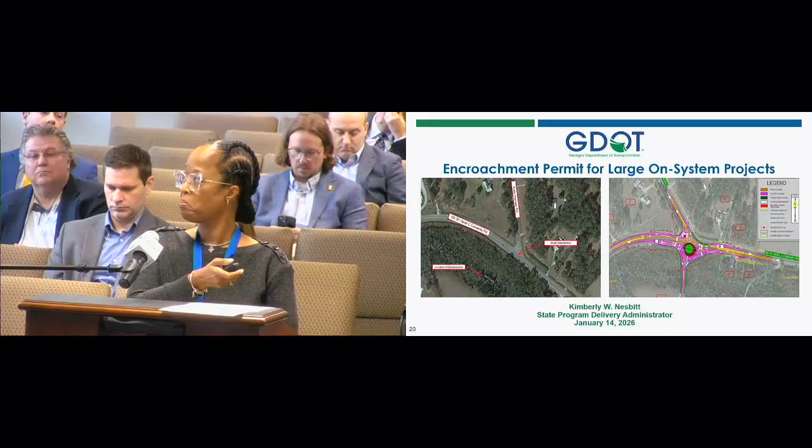Am I supposed to be pointing in a certain way? No, hold on. Get my one? Yeah, let's see. It's up. User errors. So let's continue.

The Office of Program Delivery manages over 1,000 projects statewide that follow the design bid build process. This includes federally blended and 100% state-funded projects. OPD is also responsible for the Local Administrative Program, affectionately known as LAP, for projects sponsored by local governments.

For fiscal year 2025, Office of Program Delivery successfully authorized 138 right-of-way phases equaling $131+ million in funding, and 109 projects led to construction that equal up to $1.3 billion. For fiscal year 2026, we are programmed to authorize 154 right-of-way phases equaling $106+ million in funding, and 153 projects led to construction that exceed $2.1 billion.

In order to deliver OPD's assigned program, we have over 200 employees for the capital program. Project managers on average are assigned 12 projects, and the traffic ops, bridge, and local sponsor programs have on average 20 projects. The office is also responsible for invoice processing through the Consultant Management Information System, CMIS, for A&E contracts. Our contract techs are responsible for monitoring and responding to customer service questions and issues and resolution for consultant invoice payments for the entire department.

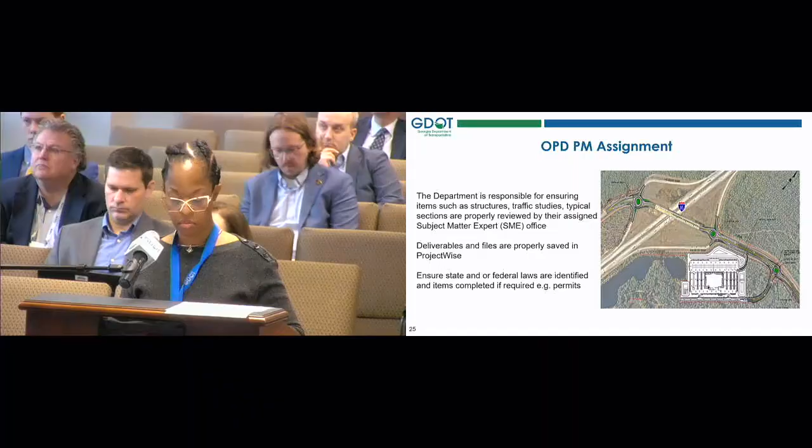GDOT ensures structures, traffic studies, and typical sections are reviewed by subject matter experts. Deliverables are stored in ProjectWise, our official electronic file software, and must comply with state and federal laws if required.

Large encroachment permits are projects funded 100% by local and private sources, as previously stated. The sponsor is guided through the process to ensure all required studies and deliverables are submitted for review and approval. Projects that qualify for this process are projects that change operations, widenings, interchanges, roundabouts, and bridge projects. The project manager also provides guidance on how to request the permit and the assignment of construction management staff by the district for the sponsor.

Key milestones of the encroachment permit process are limited scope concept reports for approval, preliminary field plan review, public outreach, preliminary bridge approval, as well as design exceptions and variances if needed.

Final milestones are final field plan review, right-of-way activities, field plan review approval, and readiness of plans, specifications, and estimate submission. For projects with right-of-way, a final field plan review is scheduled, but can be waived if the quality of the plans evaluated at preliminary review has no major concerns.

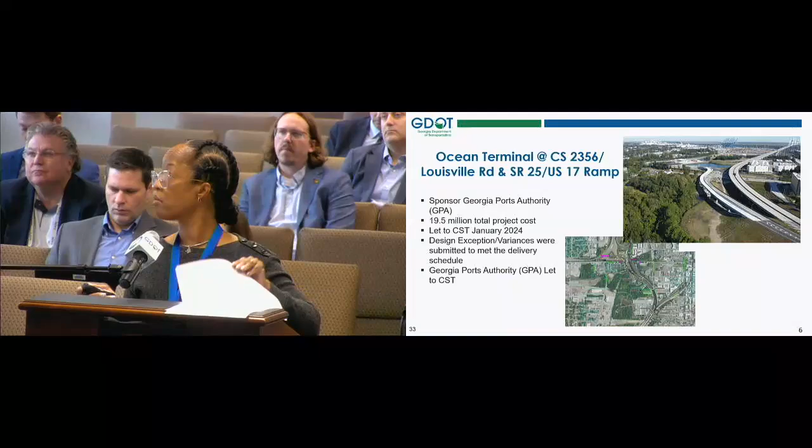To highlight a successful encroachment permit project: the Ocean Terminal at CS 2356, Louisville Road and State Route 25, US 17, ramp to Chatham County. This proposed project starts at Georgia's Port Authority Ocean Terminal and ends at the merge between I-16 westbound and US 17 State Route 404 spur southbound.

The project constructed an exit ramp dedicated to trucks from Ocean Terminal to the bridge over Louisville Road, merging with an entrance ramp for southbound US 17 State Route 404 spur. This is a great example of successful delivery that met the local developer's sponsored schedule, GDOT standards, and will increase mobility for the state of Georgia.

As you can see by the image, those are the concepts of what they thought they were going to build, and what's actually built. It's almost a perfect example of when the plans actually see fruition compared to what you thought you were going to end up building.

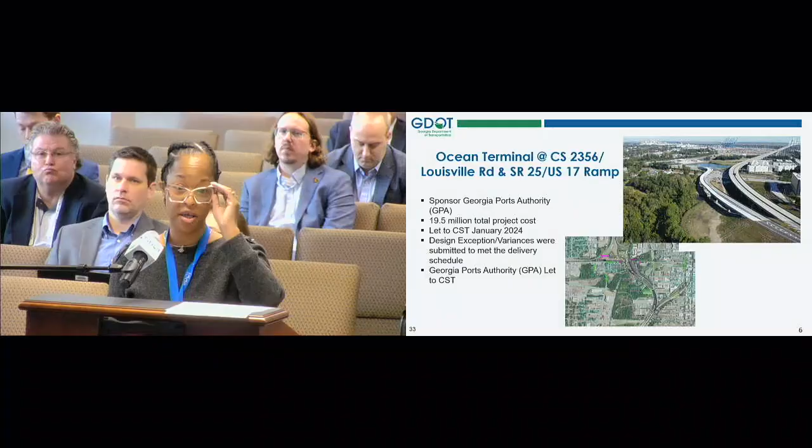But this concludes my presentation. Thank you, and if there are any questions, I'd be more than happy to entertain them.

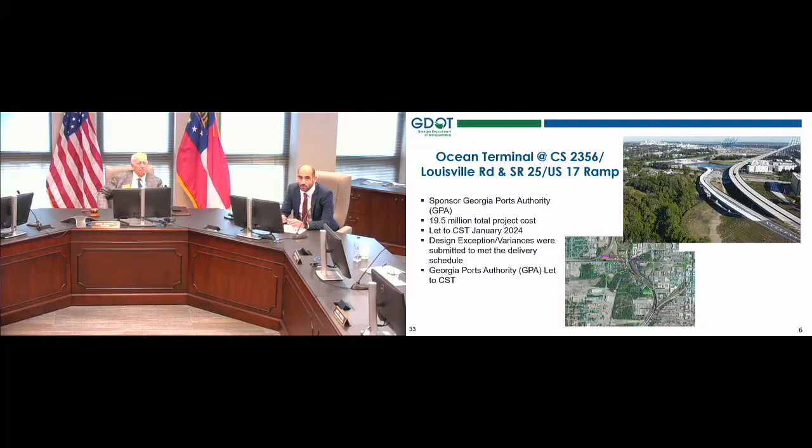Good. Ms. Nesbitt, thank you for this presentation. It's always, I'm always amazed by what your office does. I'm not surprised at what you can handle, but I'm certainly amazed. So keep up the good work. Thank you. Thank you, sir.

We intend to spend every dollar and ask for more, and get those projects on. Okay.

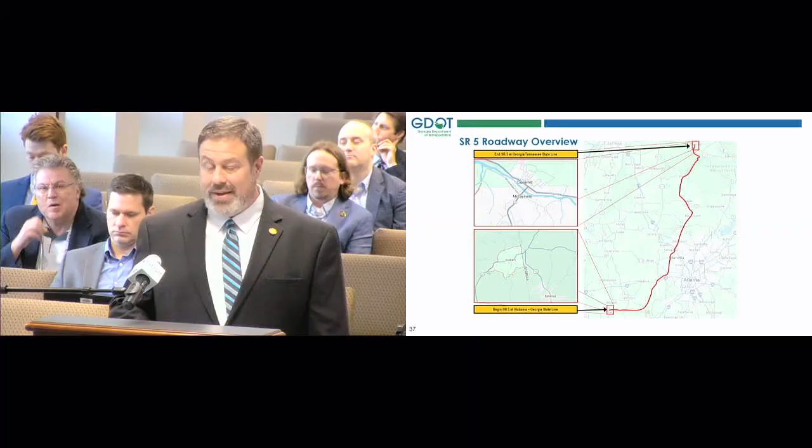Today's presentation will focus on State Route 5 projects that are either under construction or in pre-construction in Fannin County and Polk County, Tennessee. The corridor begins where SR5 diverges from US 515, beginning in Blue Ridge, and continues north to the Georgia-Tennessee state line.

I will discuss the 7 projects identified in this slide in greater detail throughout the presentation. As a reminder, the cone icon represents projects that are currently under construction.

Here's a list of those 7 projects located in GDOT District 6 and Congressional District 9, as well as 1 project in Polk County, Tennessee. The projects collectively reflect a total investment that includes preliminary engineering, right-of-way, construction, and utility of approximately $340 million.

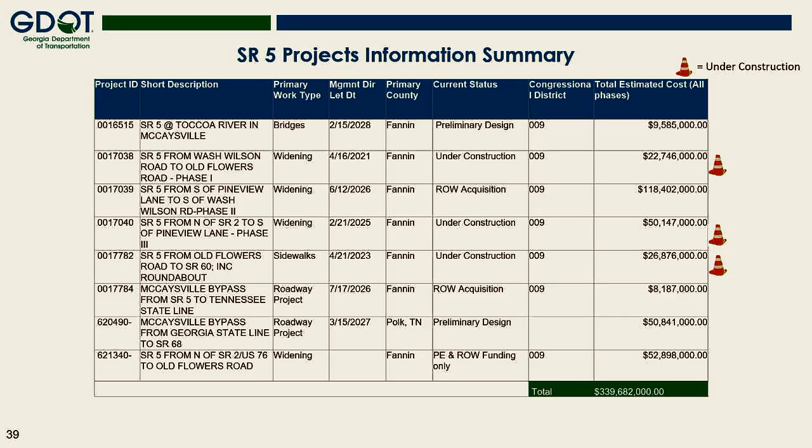The primary purpose of this corridor improvement south of McCaysville Industrial Drive is to provide additional capacity and reduce crash frequency and severity. The purpose of the north is twofold: to construct a truck alternative route to reduce conflicts between large trucks and pedestrians and private property in the downtown area of McCaysville, and to improve the operations and maintainability for the 2-lane section of roadway.

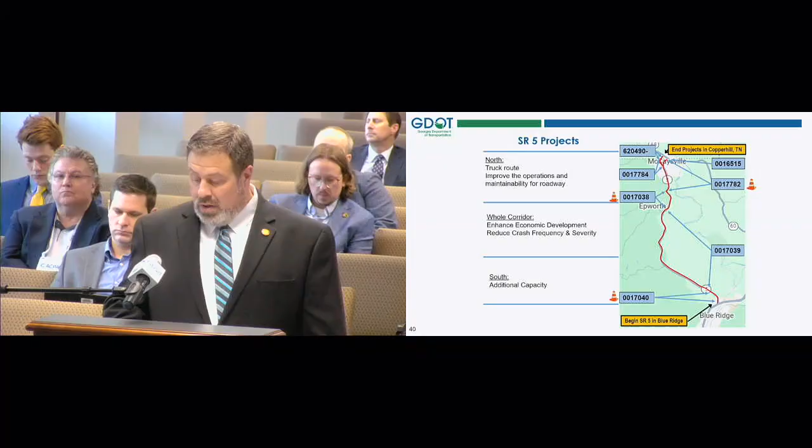All improvements are also expected to enhance economic development opportunities within Fannin County and the Appalachian region. In addition, providing these operational improvements along the corridor may lessen crash frequency and severity.

This corridor improvement proposes to widen the existing SR5 to 4 lanes with a 14-foot center turn lane beginning just north of the intersection with State Route 515 in Blue Ridge and ending at McCaysville Industrial Drive. The improvements would then transition to two 12-foot lanes with improvements to the pavement, curb and gutter, and sidewalks through downtown McCaysville. A single-lane roundabout will be constructed at SR5 at School Street to incorporate the new construction truck route.

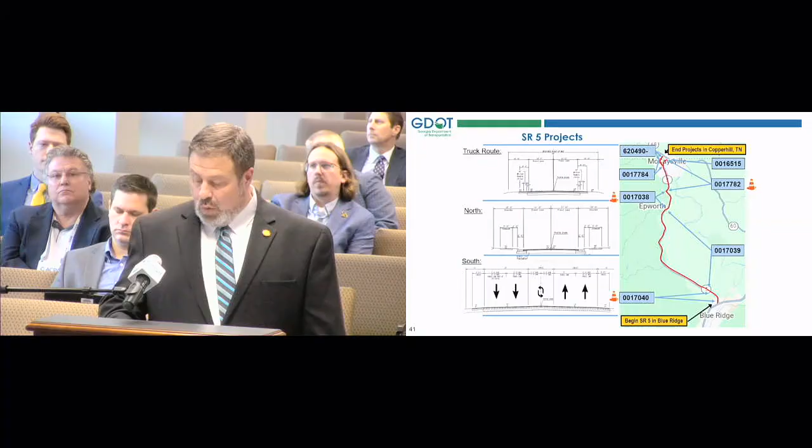The McCaysville truck route has a length of approximately 1.1 miles and terminates at a proposed roundabout at State Route 68 in Tennessee. Now I'll provide you some details of improvements along the corridor.

The first segment of SR5 is PI 17040. It is from State Route 515 for 1.24 miles to Pineview Lane. The roadway is currently 2 lanes in this section, and with improvements already at SR 515, it will be widened to a 4-lane roadway with a 2-way left turn center lane.

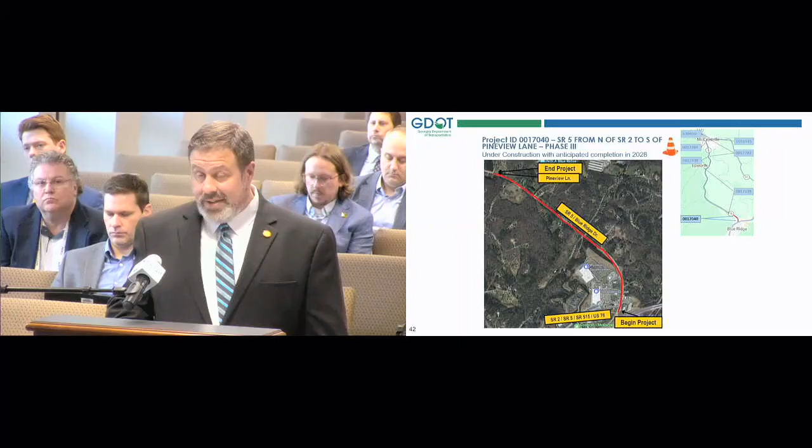This project let to construction in February of 2025 and is anticipated to be open to traffic in the summer of 2028.

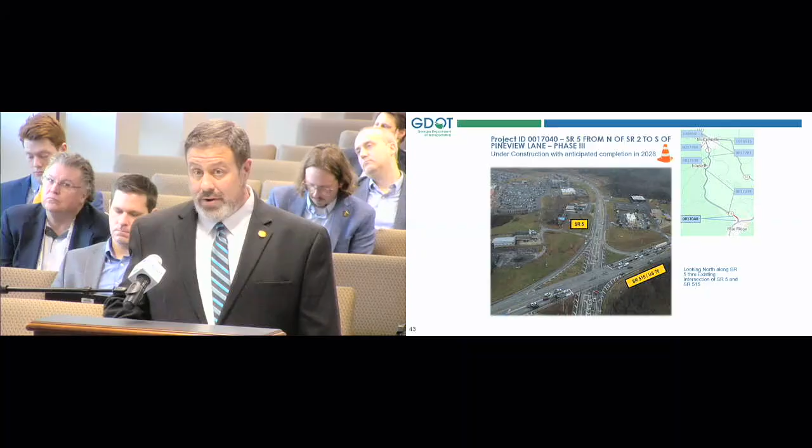This slide is looking north along State Route 5 as it deviates from State Route 515. The intersection is a high-growth area and has an average daily traffic of about 20,000 cars. State Route 5, going to the north here, has an average daily traffic of about 16,000 cars.

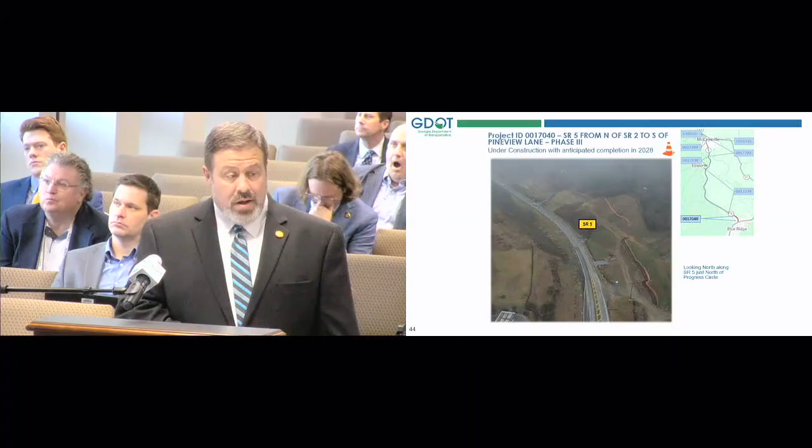This slide is looking north along State Route 5, just north of Progress Circle. You can see the clearing that has taken place and the silt fencing that is installed, although we're zoomed out. Currently, utilities is relocating in this area.

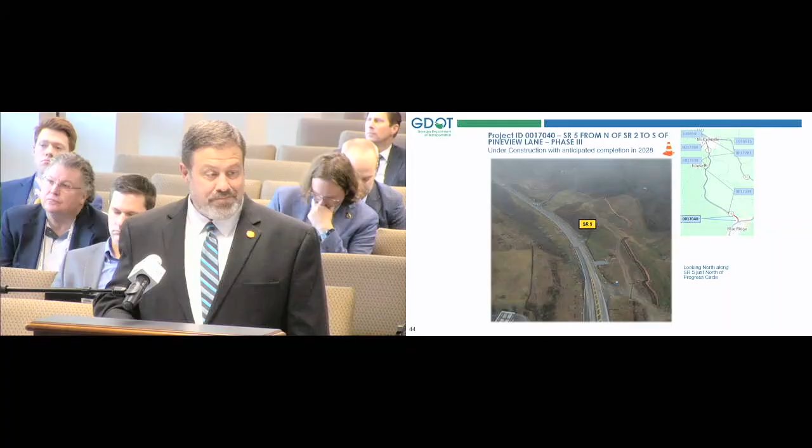The next segment of State Route 5, Project ID 17039, is 5.65 miles from Pineview Lane to Wash Wilson Road. The roadway is currently a 2-lane roadway in this section and will be widened to 4-lane with a center turn lane. The project is in right-of-way acquisition and has construction funding proposed for FY 2028.

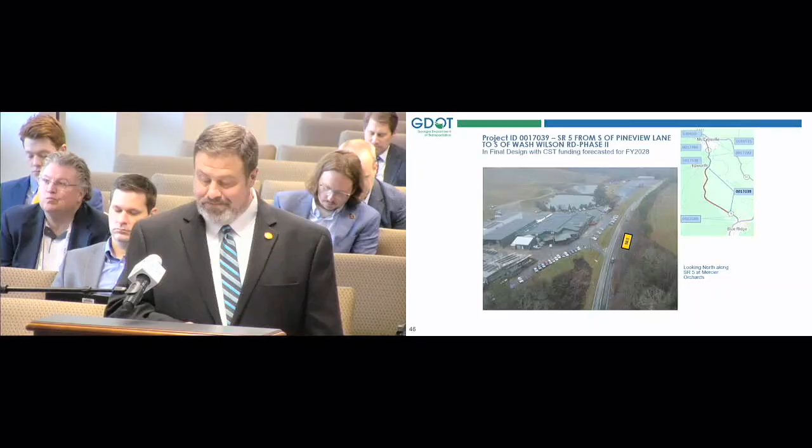The next segment, PI 17038, is 1.52 miles from Wash Wilson Road to Old Flowers Road. The roadway is currently 2 lanes in this section as well, and it will be widened to 4-lane with a center turn lane up to McCaysville Industrial Drive. From McCaysville Industrial Drive to Old Flowers Road, it will transition back to a 2-lane roadway.

The project let to construction in 2021 and is anticipated to be open to traffic in the summer of 2026.

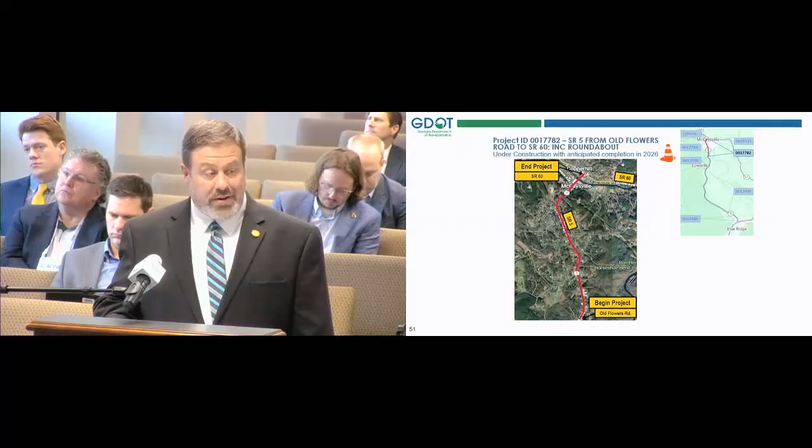The next segment of SR5, PI 17782, is 1.83 miles from Old Flowers Road to State Route 60. This project is reconstructing the 2-lane roadway with curb, gutter, and sidewalks, and construction of the roundabout at School Street for the truck route. This project let construction in 2023 and is anticipated to be open to traffic this spring.

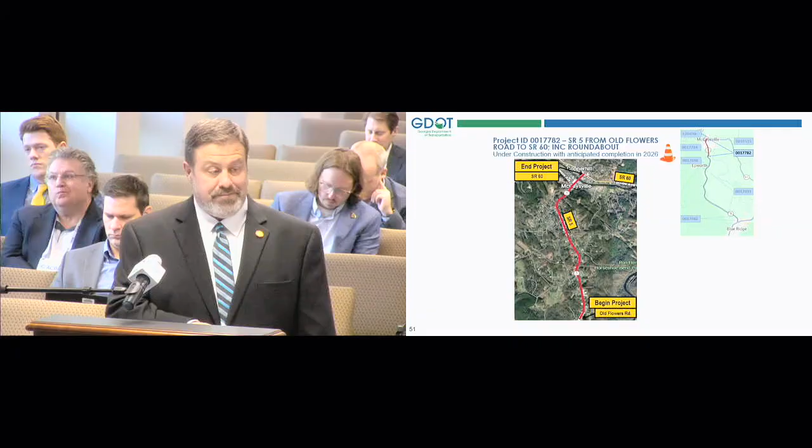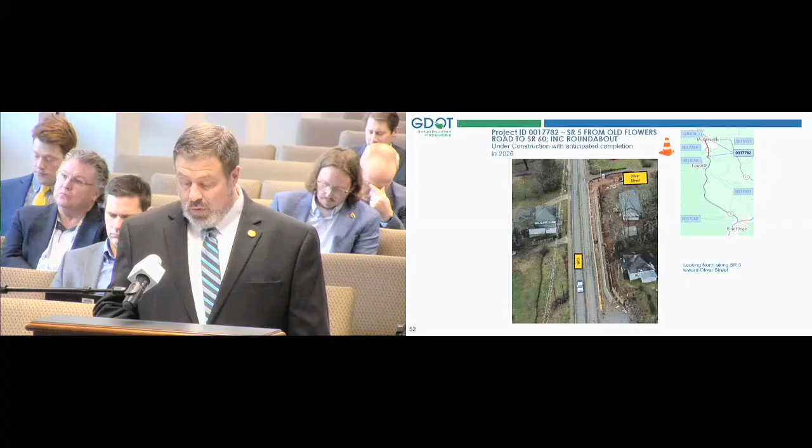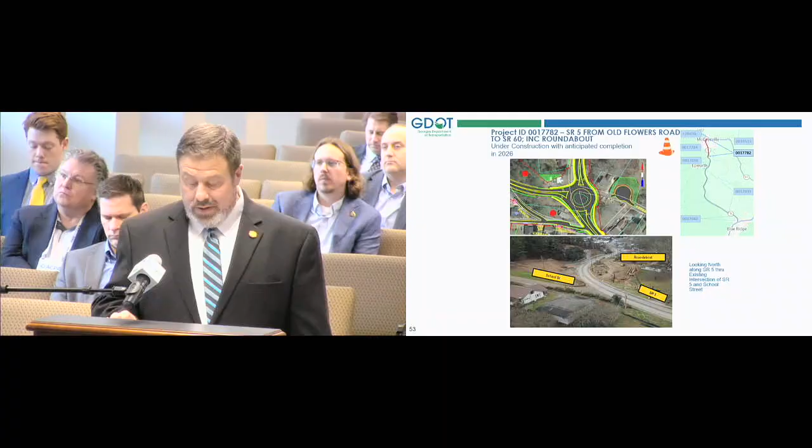This slide is looking north along State Route 5, just south of Oliver Street. You can see the construction of a wall and the utilities being relocated. The top photo is the proposed roundabout design at School Street. The bottom photo is looking north along SR5 through the intersection at School Street, showing the clearing for the roundabout and the utility relocations taking place.

The next project, PI 17784, is 0.34 miles and is the first segment of the truck route. This project will construct a new location 2-lane truck route from SR5 to the Georgia-Tennessee state line. This project has completed right-of-way acquisition and design and is scheduled to let this summer.

The next project, PI 620490, is 0.84 miles and is the second segment of the truck route. This project will construct the new location 2-lane roadway from the Georgia-Tennessee state line to Tennessee Route 68. This is all in Tennessee. The project is expecting right-of-way acquisition by Tennessee to begin early this year and will need 14 months to acquire the property.

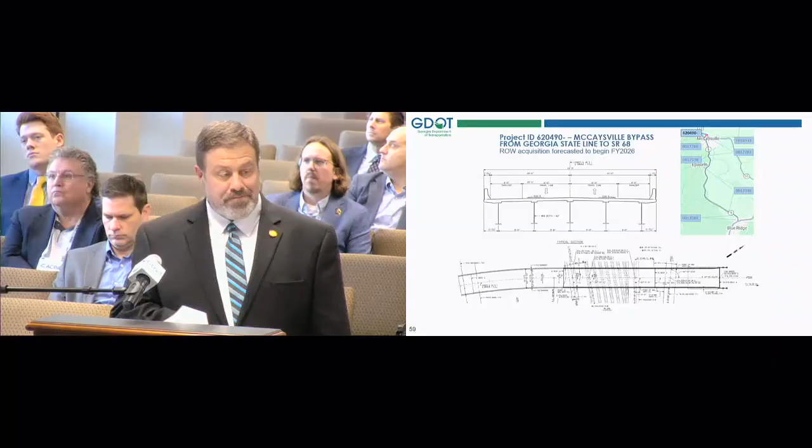This slide shows the proposed design of the new bridge required for the truck route. This bridge has a total length of 1,300 feet and it will span over West Tennessee Avenue, the Ocoee River, the Tennessee Overhill Association Railroad that includes 6 tracks and a service road, and finally Tennessee's Route 68. This project is forecasted to let by Tennessee DOT in the second quarter of 2027.

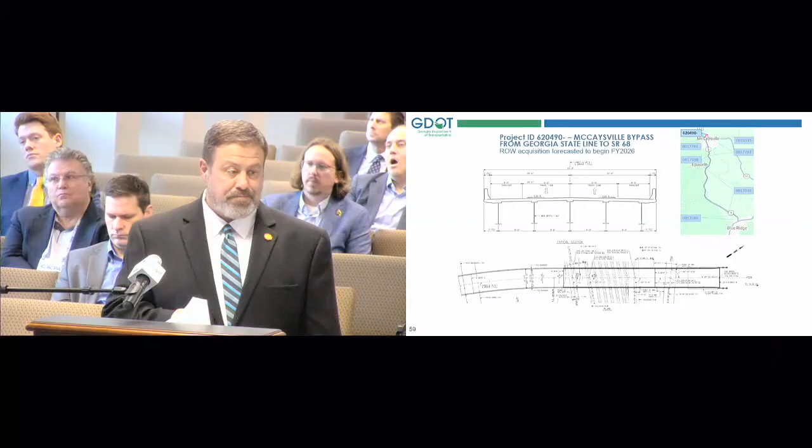Then the final project, ID 16515, is the replacement of the SR5 bridge over the Toccoa River in McCaysville. This project is in preliminary design with right-of-way acquisition expected to begin in the fall of 2026.

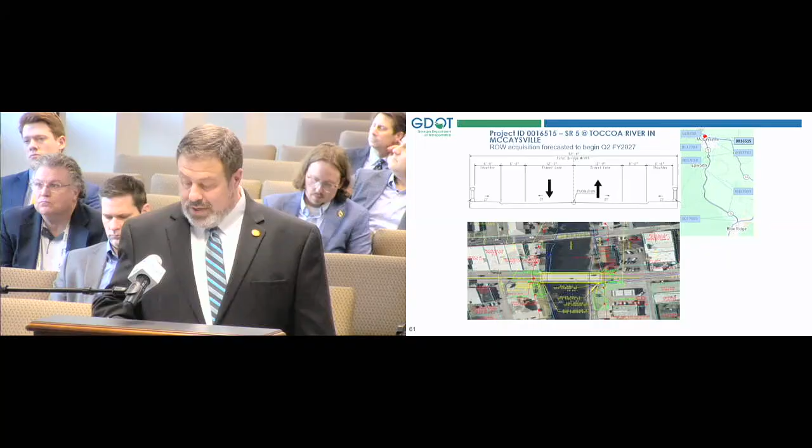This slide shows the proposed bridge replacement of the existing bridge. The existing 2-lane bridge was originally built in 1936. The new bridge will have wider sidewalks to accommodate pedestrians and improve drainage conditions.

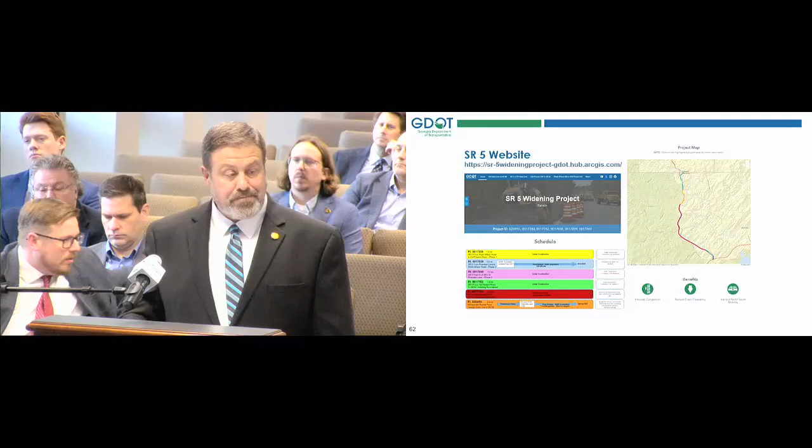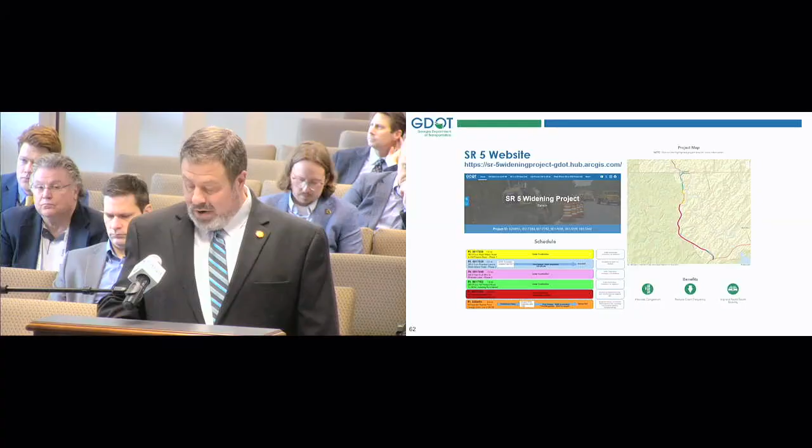The delivery of these projects required a significant amount of stakeholder as well as public involvement. GDOT representatives met with city and county representatives, HOAs, community groups, and developers along the corridor to inform and coordinate the schedule and impacts of the projects. Public information open houses were completed in 2011, 2016, and 2018, and we plan on going back out to the public early this year. GDOT has recently updated the project corridor website with updated plans, need and purpose statements, and planned detour routes. The website can also be reached by visiting the major project section of the GDOT website.

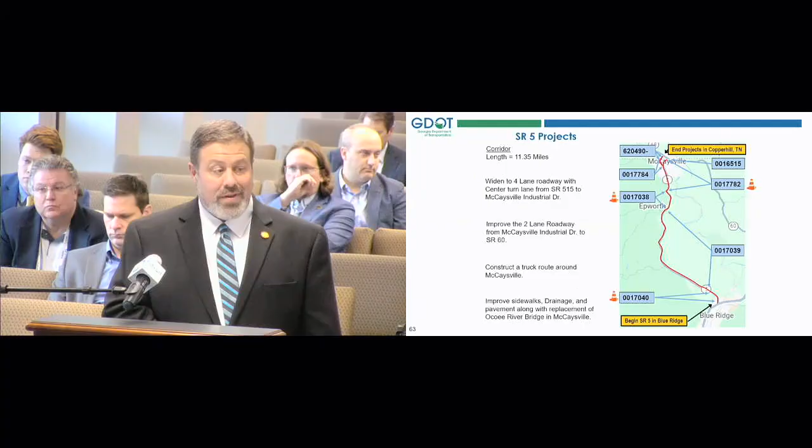To recap, there are 7 projects in construction or in design along State Route 5 from Blue Ridge to McCaysville. The delivery of these projects required a significant amount of stakeholder as well as public involvement. GDOT remains committed to delivering these projects with pre-construction and construction phases in the most efficient manner possible. These projects will improve capacity and operations as well as promote economic development in the region. And with that, I'd like to thank you for your time, and I'm open to any questions you may have.

Thank you, Mr. Lott, for that presentation. It's really, really good. Any questions from committee members? Yes. I agree, I think we should be very proud of what you all do.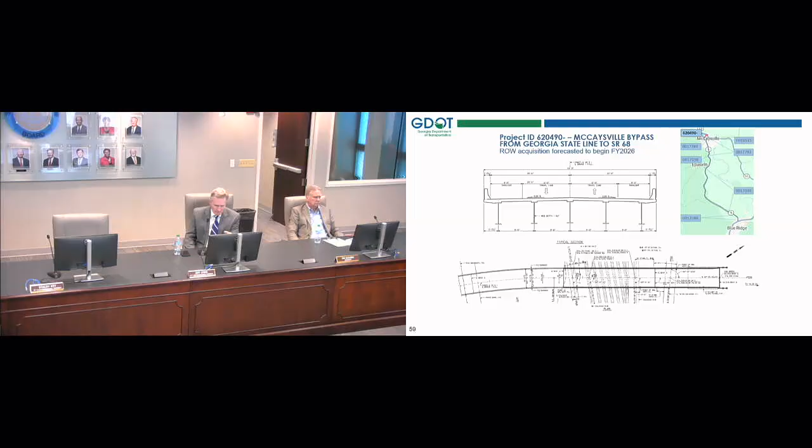That's right. Hey, could I ask you to go back to that picture of the slide that showed the bridge over the river? Yeah, the other one, the one before that. That one, yeah. I'm assuming the new bridge is the lower bridge. Is it replacing that upper crossing? No sir, we're actually replacing the bridge on the bottom. That's the current bridge. The bridge above it is actually a truss bridge that's even older than the bridge that we're replacing. Okay, that answers that.

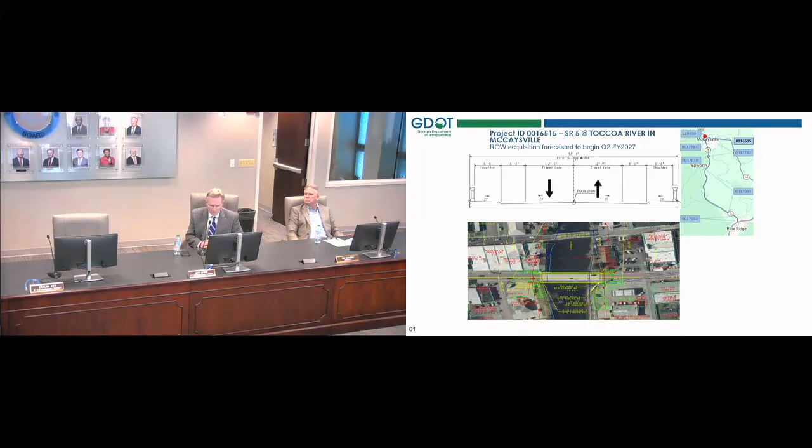So that top bridge does not allow truck traffic and stuff like that on it. Okay, cool. Anything else from the committee? I like that. How many miles did you say the total project was? I believe it's 20 miles, I believe.

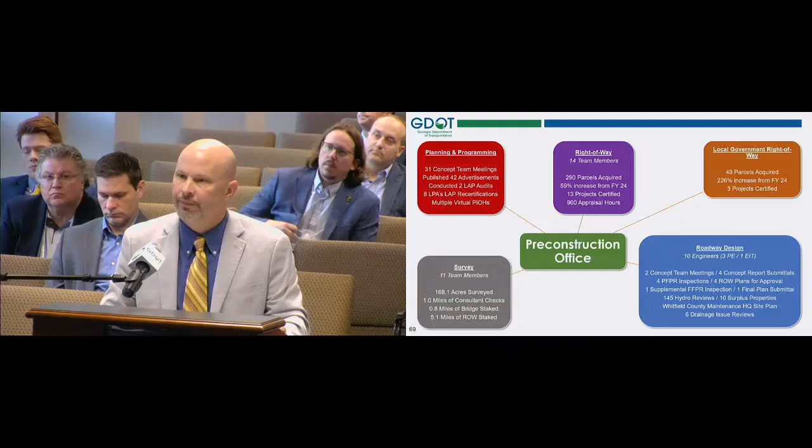I want to highlight the project that our pre-construction team delivered over to construction last year. This project is in Pickens County, State Route 53 business at Dragon Drive. This is the only entrance to the Pickens County High School, and it currently has a traffic signal. But we started to notice an increase in the number of left turn crashes at the intersection, and we were able to secure safety funding to install a roundabout at this location.

Our design team took on the challenge to deliver the project, and our right-of-way team acquired the property we needed. This one was difficult because it required substantial coordination with the school system, both for design and right-of-way. Just north of this crossing there's an at-grade railroad crossing, and nothing can slow down a project like having to coordinate with the railroad. The school system was adamant to have a right turn bypass to approach the school, but our design team was able to work with them and make that work without impacting the railroad crossing, keeping the project on schedule.

Also, our right-of-way team had to work with the school on an electronic sign that was not located on their property, and worked through that issue with them. But in that process, we discovered that the driveway was actually not located on the school property either - it was on an easement. So that was a backup and start over with our right-of-way acquisition. But despite these challenges, our team worked hard to deliver the project, and it was included in the letting last July.

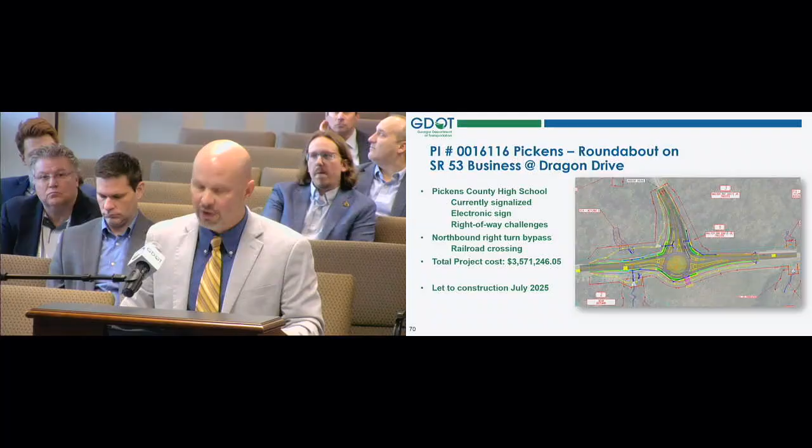So now I'm going to move over to the construction office, and this chart shows our active construction projects by improvement type. So currently, District 6 has 51 projects under construction with a contract value of $819 million. That's a record for the district. We completed 16 projects in fiscal year '25.

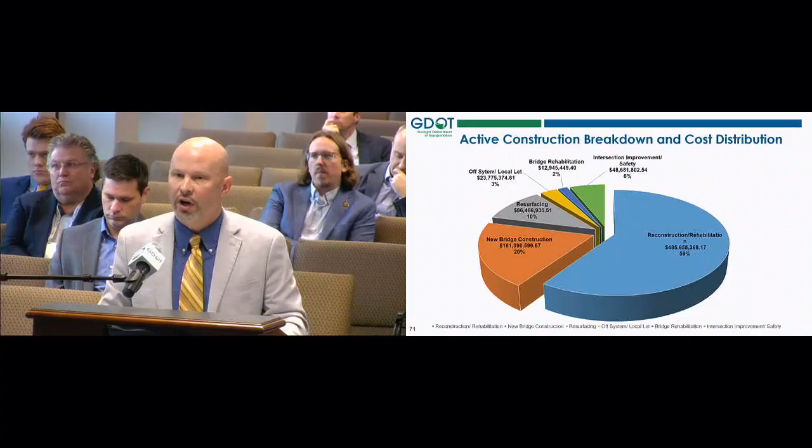Widening projects make up the largest share of the work, with 59% being reconstruction and rehabilitation. Bridge projects make up the second largest group, at 20% of our work. Maintenance resurfacing is the third largest, at 10%. Now I'm going to highlight one project for each of the congressional districts in Northwest Georgia.

So I'm going to start in Congressional District 7. This project will widen State Route 20 in eastern Cherokee County. I have the projects listed here going from west to east. The first two projects are open to traffic. We now have a 6-lane divided highway going from I-575 to Union Hill Road.

The next phase that we have under construction is on the other end of the county, and that goes from State Route 369 to Post Road in Forsyth County. That's the single largest construction project that we have in the district. It's got a contract value of $104 million.

So that project's currently 11% complete. The primary work so far has been clearing and utility relocations. The next project to get started is going to widen from East Cherokee Drive over to State Route 369.

And that project was included in the November letting just a couple of months ago. The last project is going to go from Union Hill Road to East Cherokee Drive, and it's currently planned for the March letting, provided there's funding available.

So this will be the last project that will complete the corridor widening. And if you look at the corridor as a whole, including all phases—design, right-of-way, construction, and utilities—across all 5 projects, you're looking at an investment of $457 million to widen State Route 20 in Cherokee County.

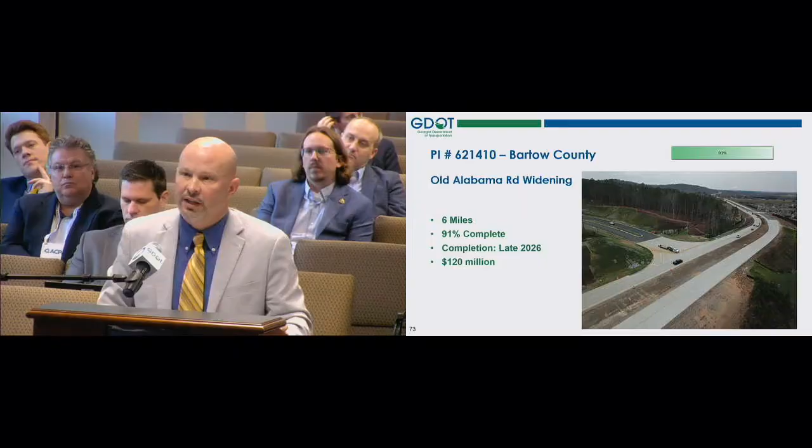The next project I want to talk about is the Villa Rica North Loop Bypass in Congressional District 3. I'm proud to report that we officially opened this road to traffic on January 5th. The project delivers 2 miles of new location roadway. It connects State Route 101 to State Route 61 with 2 modern roundabouts on each end of the bypass.

Mr. McIntyre, I know you know better than anyone what relief this is going to bring for downtown Villa Rica. Previously, State Route 61 forced tractor trailers to navigate an all-way stop and then go through back-to-back 90-degree turns across the Norfolk Southern Railroad crossing. If drivers didn't make that turn just right, they were stuck trying to back up in downtown, or worse, they would hit the crossbucks or the traffic signal.

With the opening of this road, truckers are going to have a much easier way to get from one side of Villa Rica to the other. The project also included a tunnel under the new roadway for the future Gold Nugget Trail. By collaborating with the city for this future multi-use path, we've saved taxpayers from a significantly more complex and expensive project to build the trail down the road. The total cost for all phases of the project is $42.5 million, and like I said, it's a road you can go drive on today.

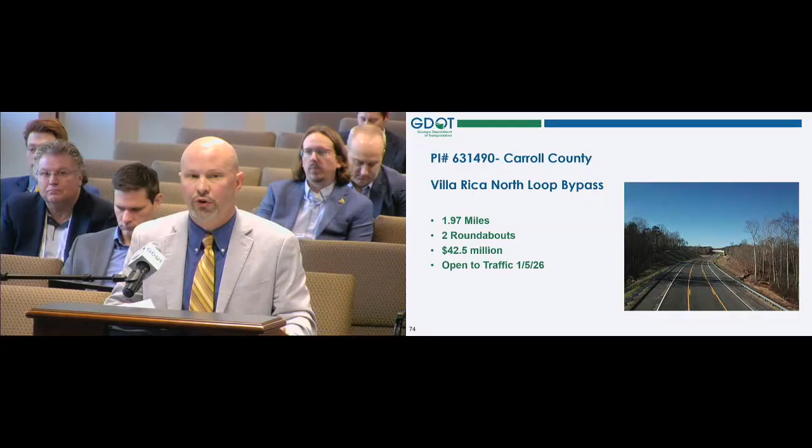The next series of projects I want to discuss are the State Route 5 widening projects in Fannin County. That's in Congressional District 9. Brian Lott just gave a very thorough update on this corridor, so I'm just going to touch on it briefly. We have 3 out of the 4 widening projects under construction on this corridor. The last project, from Pineview Lane to Wash Wilson Road, is going to be wrapping up design work soon and will go to construction once funding is available.

I want to mention this corridor has benefited from state general funds. The southernmost project received over $40 million to be able to advance into construction. It was due to those state general funds that we were able to get the portion of the road from State Route 515 to Pineview Lane into construction.

The final corridor project I want to talk about is in Congressional District 14, widening of State Route 92 in Paulding County. The first project to widen was from the Douglas County line into Nebo Road on the south side of the county. That was open to traffic in 2024. Currently, we have 2 projects on the other side of the county, the northeastern side, that are under construction. They're currently 50% complete and expected to finish in spring of 2027. Those 2 projects represent an investment of $90.9 million in the corridor.

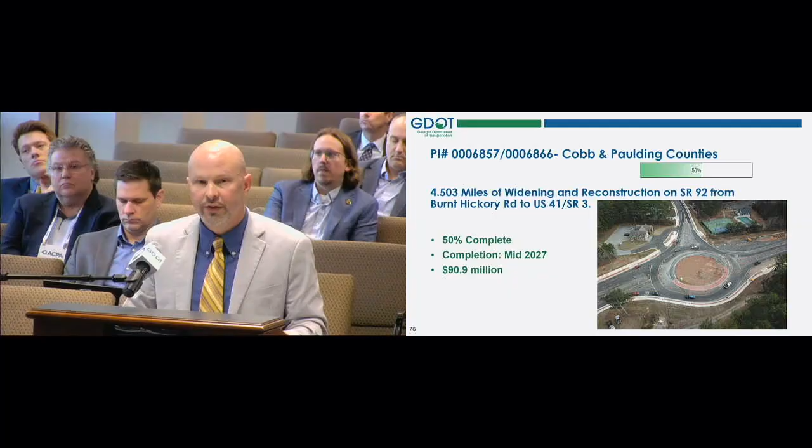There are 5 projects left to complete the corridor widening. 2 of those are planned for fiscal year 27, and the last 3 are planned for fiscal year 28 if funding is available. In the final alignment, State Route 92 will be a multi-lane divided highway that can accommodate the increased traffic from the quickly growing Paulding County.

However, despite following these protocols to the letter, we've recently identified a troubling spike in fatal crashes approaching our work zones on rural interstates. Every time there's a fatal crash, we dispatch a safety enhancement specialist to review the situation and see if there are any improvements we can make to the roadway. What we found during these reviews is we were deploying the traffic control exactly as planned. There were no equipment or setup failures.

The challenge lies in the unique environment for rural interstates. It's very high speeds in an area where drivers just don't expect to see congestion. We're now seeing more rear-end crashes at the beginning of our queues going into our work zones, and I believe the primary driver for this increase is the rise in distracted driving. Motorists simply are not reacting to traffic stopped in front of them, and they're having rear-end crashes as they hit the back of the queue.

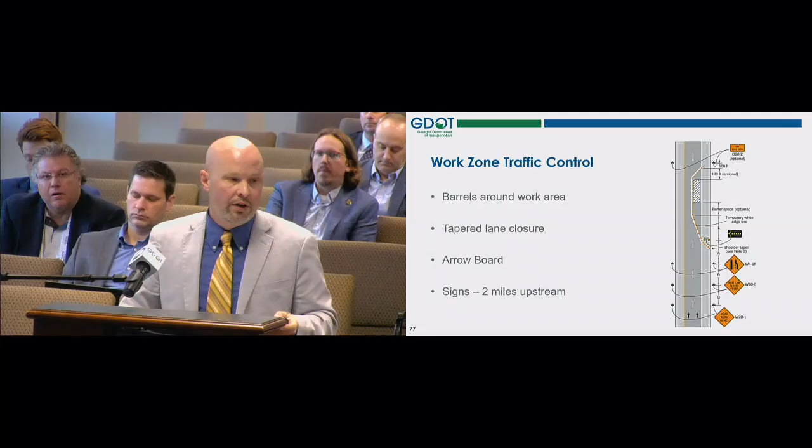It's got a programmable message board. Unlike static signs, this vehicle is designed to be dynamic. It sits on the shoulder, and its mission is to stay with the beginning of that queue. So as the queue builds or recedes, the vehicle moves in reverse or forward on the shoulder, always staying ahead of that stopped traffic. So the first thing a high-speed motorist sees is a massive lighted warning.

I actually equipped this vehicle with a rear-facing camera. I intended to show you some videos of the near misses we tend to see at the beginning of work zones, but I've got none of those to show you today. We had 0 incidents approaching our work zone. That's a massive success. In our world, no news is the best news possible. Interesting videos would have made this presentation more enjoyable, but I'm happy to say nobody crashed in this work zone. I think the queue protection plan deserves consideration on future rural interstate projects.

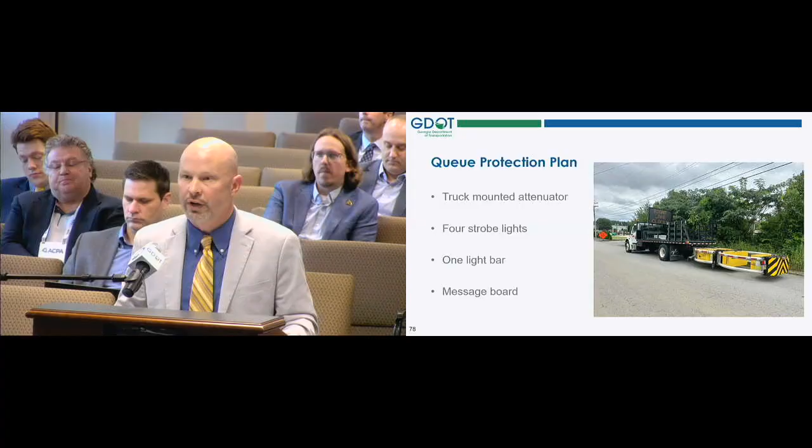Now I'm going to change over to our maintenance office, starting with our canopy clearing on our interstate routes. Removing trees that are too close to the roadway is important for a number of reasons, but most importantly, it improves the clear zone, that recovery area that motorists need whenever they leave the roadway.

Removing fixed objects near the pavement gives drivers more room to safely slow down or stop without hitting a hazardous object. Trees too close to the roadway can also fall on the road, which is very concerning at interstate speeds.

There's also a benefit for winter weather. Especially towards the end of the event, as you're driving around, the roads look mostly clear, but as you approach shady spots, you might still see snow and ice in the shade. By removing the canopy, we're opening that up for more daylight, which is the department's best ally to get the roads back open and safe for the traveling public. That decreases the amount of rock and salt we have to deploy, and gets our roads open back much faster.

Last year, we focused heavily on I-20 in Carroll County, as well as some slope maintenance contracts across the district to make sure the areas we previously cleared don't grow back up. During fiscal year 25, we executed 7 canopy clearing contracts. This fiscal year, we're going to execute another 5, completing I-20 and I-575. Once that work is complete, we're finished with canopy clearing on the interstates in District 6. It's been a long time coming, and I'm excited to see the completion in sight.

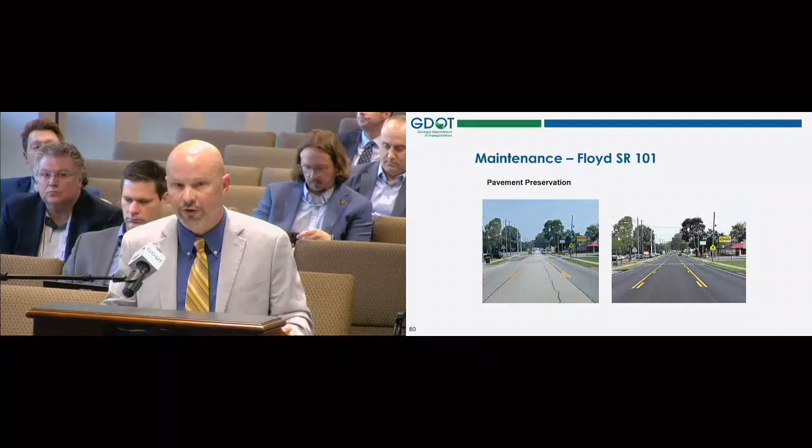Another activity we focused on during fiscal year 25 is our drainage maintenance. These structures play a vital role in GDOT's overall transportation system. Getting water off the roadway and keeping it off is very important. We've utilized our maintenance contracts to replace pipes as well as extend their useful life. This year, we completed 13 pipe relinings and replaced 13 pipes. 11 of those were dig and replace, and 2 were replaced by jack and bore.

We're planning to continue this work into fiscal year 26. We have 9 locations for relining planned and 8 pipe replacements.

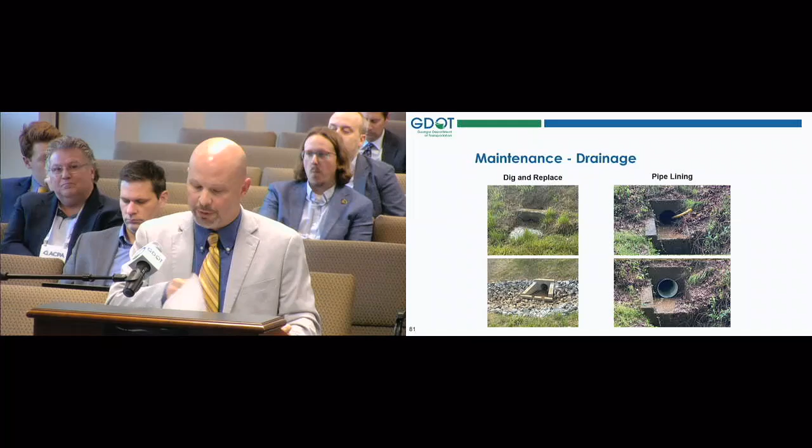Another focus for our maintenance office has been keeping our guardrail in a good state of repair. Guardrail maintenance is critical for roadway safety, providing protection for motorists and preventing them from departing the roadway or hitting a hazardous object. The last time I talked with you, we had just restarted our in-house guardrail crew. I'm pleased to report their good work has continued.

During fiscal year 25, we completed 636 repairs, with 291 of those by our in-house guardrail crew. Guardrail is one of those underappreciated devices that you just don't notice until it's damaged, but it's very important to keep drivers from hitting hazardous objects, so the cost is substantial. In District 6, we spent $2.7 million over the last year just replacing guardrail.

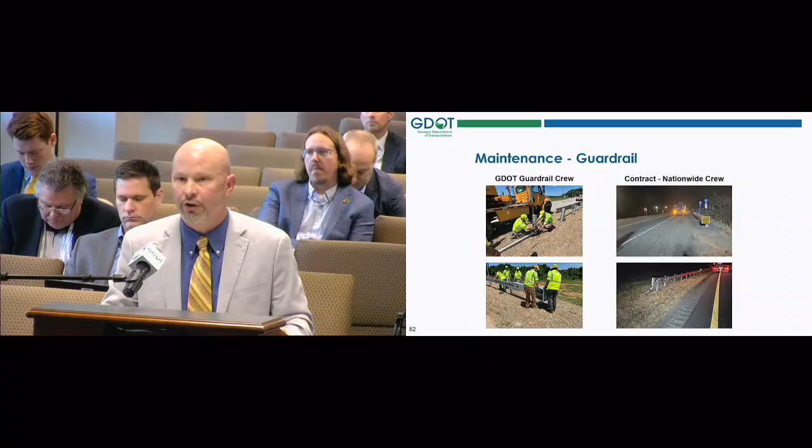All right, and finally, you just can't talk about maintenance without mentioning the winter weather response. This last year, winter gave us some unusual challenges. January 10th of 25 brought a significant winter weather event to District 6. While parts of the district saw 6 inches of snow, which was our largest event in years, the real story is the sheer volume of resources our team brought to bear to keep Northwest Georgia open. Altogether, we worked 10,655 person hours for the event. That's essentially doing 5 years worth of work in just 4 days.

We deployed 105,000 gallons of brine, 3,600 tons of salt, 727 tons of stone, and 11,000 pounds of calcium chloride. Now, I want to help you visualize just how much brine that is. If you put 105,000 gallons of brine into tanker trucks and lined them up in a convoy going down the interstate, that convoy would stretch for 1/3 of a mile.

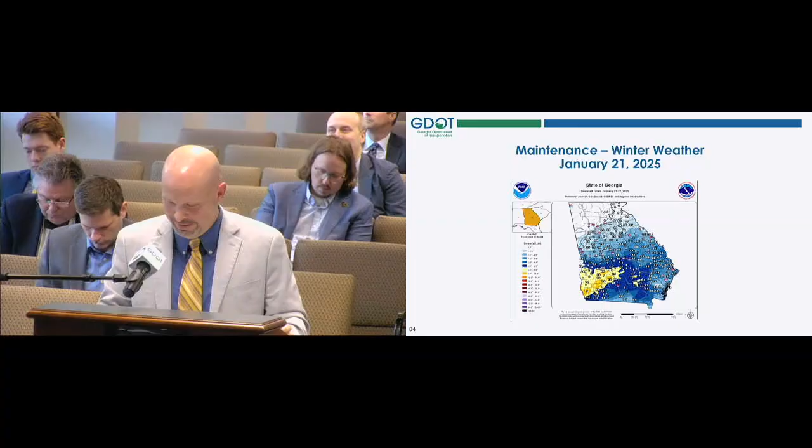All right, one more thing in maintenance. I want to talk about our work on 2 railroad crossings in Gilmer. Now, we don't typically work close to rail lines, that's the responsibility of the rail owner. But in this case, the crossing was rough, and this part of the rail line was no longer in service. So the decision was made to remove the crossings until those lines were reactivated. This project required coordination between GDOT and Patriot Rail, and the nature of the work required closing of the state route as we removed the rail crossing.

During this time, the crossing was completely rebuilt from the base up. State Route 2 required 690 person hours, 20 tons of GAB, 10 tons of asphalt. State Route 282 required 632 hours, 52 tons of GAB, and 23 tons of asphalt. This was great work by our District 6 team to eliminate the rough crossings while continuously working to minimize disruption to the traveling public.

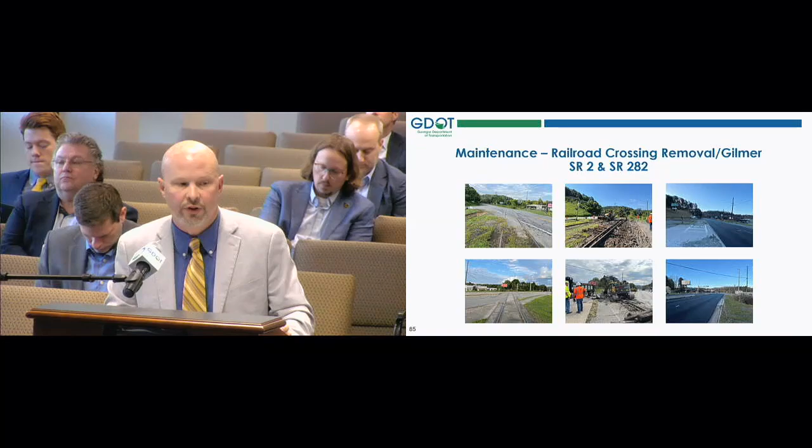All right, moving over to the utility office. During fiscal year 25, the office approved 1,190 utility permits, with an average approval time of just 2.6 days. So if people say we're not approving permits fast, you can reference this number. We're less than 3 days.

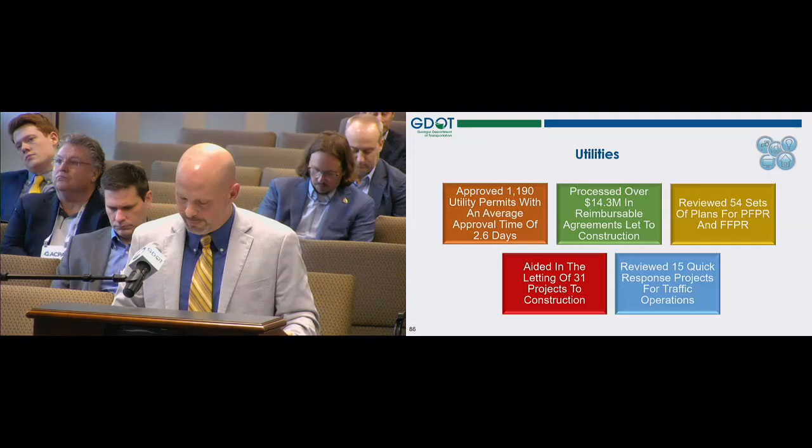They processed over $14.3 million in reimbursable agreements to make the roadways ready for construction. They participated in reviewed plans for 54 field plan reviews. They aided in the letting of 31 projects. They reviewed 15 quick response projects. And the work in this office is critical to delivering our construction program, because honestly, utility relocations end up taking about half of the overall construction time for a widening or any other project.

There are 3 primary factors in every crash: the driver, the vehicle, and the road. We have the most influence over that last factor, and we've been working very hard to keep our roadways safe, especially with the rise in distracted driving. We've been placing edge line and center line rumble strips across the state route system. We've enhanced the signage to prevent wrong-way drivers. We've even put down special pavement in our sharp curves to improve the friction and improve the signage in those curves.

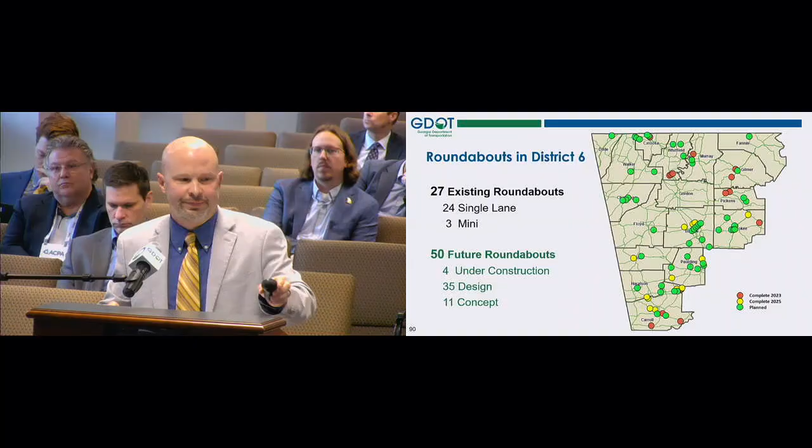Thank you, Mr. Baldwin. Any questions? Lot going on. Yes, sir. Thank you very much. Thank you.